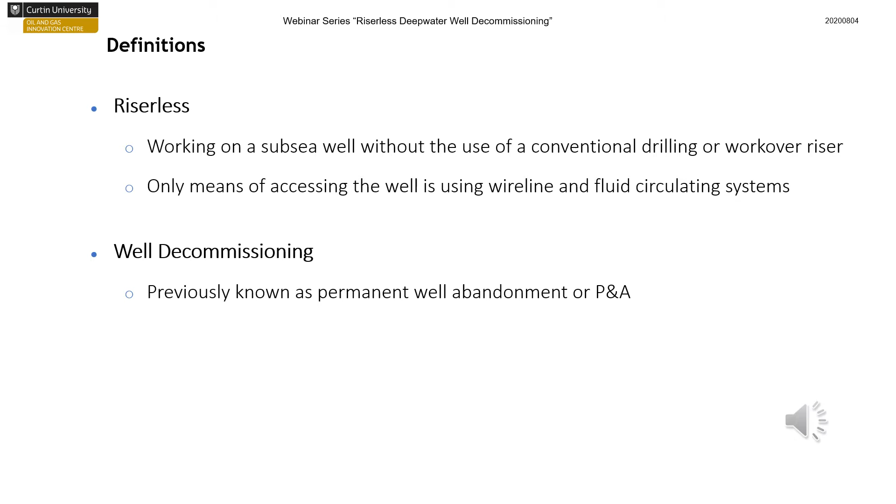In terms of wet or dry trees, the main difference is clearly the access method. A dry tree is on a platform or on land, and a wet tree is underwater. So with a dry tree, very simple, you can rig up with a drilling rig, workover rig, hydraulic workover unit, coil, or you can use wireline and pumping, which is the more preferred method from a cost perspective because you can then apply rigless techniques to the dry tree wells.

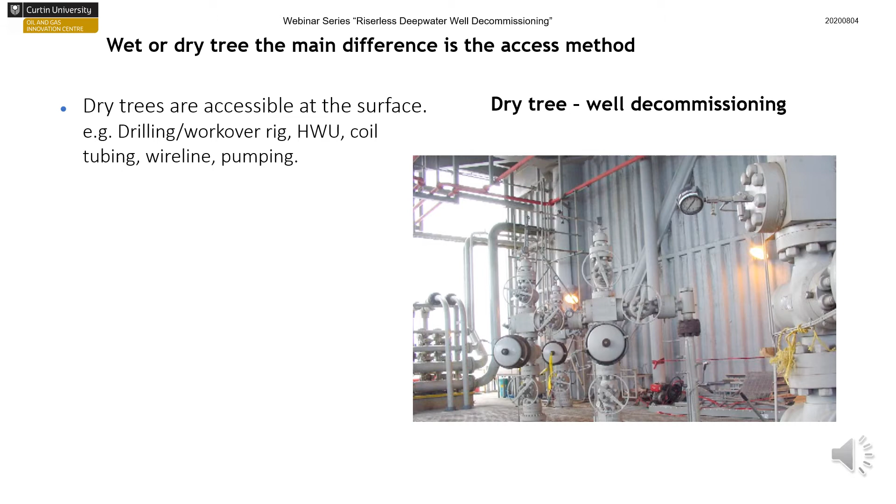With subsea, especially deep water, the fundamental difference is you have to have a vessel of some description, and from that vessel you then need to launch specialist equipment that allows you to make a pressure connection to the top of the tree, whether it's vertical or horizontal, so that you have well control during your deep water well decommissioning operations.

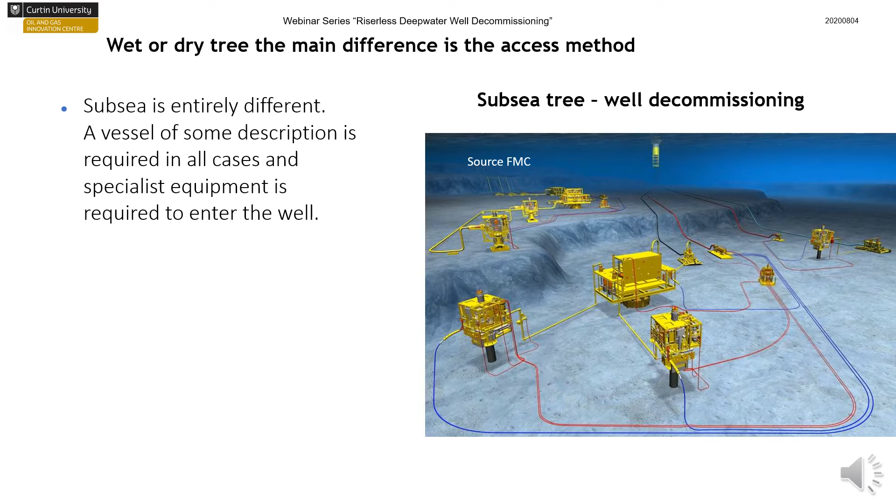We know we need a vessel, so let's understand what those vessel types could be. We've taken here, Statoil as a source - it's the Norwegian continental shelf categories of vessels to access wells. Cat A is quite often a monohull, and the capabilities are usually interfacing with the tree with a subsea intervention system and the capability to run wireline.

Cat B can be a small semi-sub or a monohull, but the difference is it can riser up with a high pressure, rather small ID riser, but it can do a little bit more with through tubing access. Now Cat C are your standard drilling rigs developed by the drilling contractors. It can be semis, drill ships, ultra deep water drill ships, deep water jackups, and we'll only be talking about the first three categories in this particular webinar.

But for interest, Cat D is what Statoil classes a workhorse semi, and its basic aim is for production drilling and completion operations up to the ice edge. Cat I is currently in development, but it's a very harsh environment, Arctic drill ship. And Cat J is again, a workhorse jackup for water depths between 70 and 150 meters, specifically targeted at harsh environments, which is very prevalent offshore Norway.

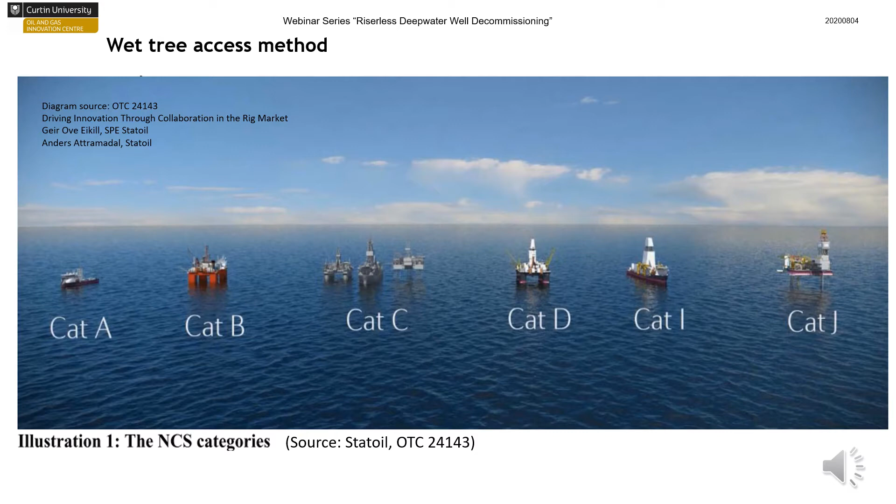As always in the oil and gas industry, nothing's quite black and white, but let's just, for the sake of clarity, define pictorially what those classifications for the first three cats are. So you've got rigless light well intervention, normally a monohull, left hand side of the graphic, and it's wireline. Obviously you can run tractors on electric line. Very short BHAs because they're limited by the length of the riser above the subsea intervention system.

Cat B is for slightly heavier intervention and through tubing access. Normally there's a small bore riser which gives you full pressure access to the well, and you can do quite a reasonable range of through tubing services. And Cat C, which is your normal drilling and completion rigs, semis or drill ships, and they've got a standard set of large bore, usually 18 3/4 BOPs, and then above that you've got the low pressure, normally a 21-inch standard riser. You can riser up with a concentric high pressure and a subsea test tree if you want to do live well intervention, but we won't be discussing that here because it's rather an expensive exercise and it's not targeted specifically at well decommissioning in deep water.

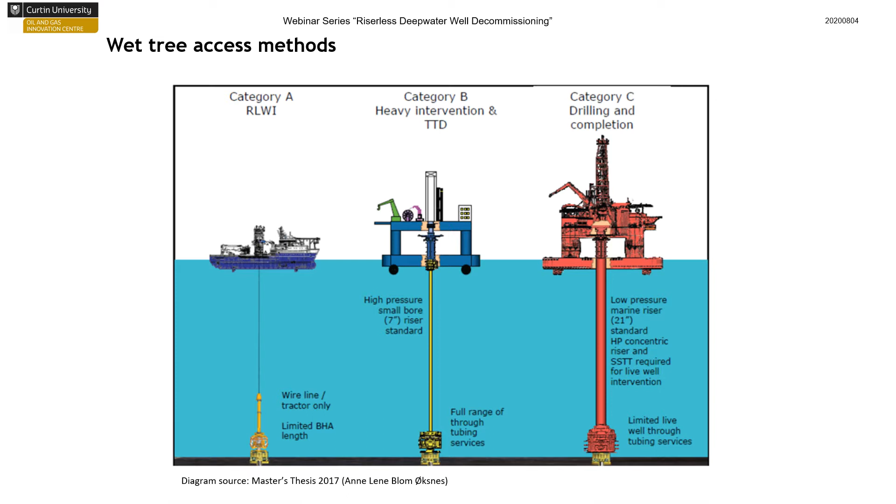So in a deep water well decommissioning environment, you have to consider a myriad of different variables, but let's just look at a short list. So you have to define corporately what your decom strategy is. Is it to look at the operation, say we'd like to execute to satisfy our corporate and our regulatory body, but we'd like to use a riserless method? Great. Or we'd like to go riser because we're more confident that that's what we'll need because there are problems with wells. That's possible.

Are you looking at caprock restoration? A lot of companies are now looking at this because of the significant cost and time savings. It may or may not be applicable to your organization, but certainly it's definitely worth pursuing if you have the opportunity.

When you look at vessel type, that comes from whether you are risering up or trying to go riserless. Complexity obviously plays a great part in this. Water depth plays a great part too. And never forget that economics drives everything. So no matter what you decide, it'll be the financials that determine whether to proceed with an investment decision.

With respect to complexity of completion design, there are some things to keep in mind. In the newer deepwater wells, there can often be chemical injection lines going deep into the well. There can also be electric lines, and some regulations indicate it's best practice not to include those within a well barrier element, although research in the last few years indicates that's perhaps not as big an issue as people thought with respect to microannulus formation around those umbilicals and electric lines.

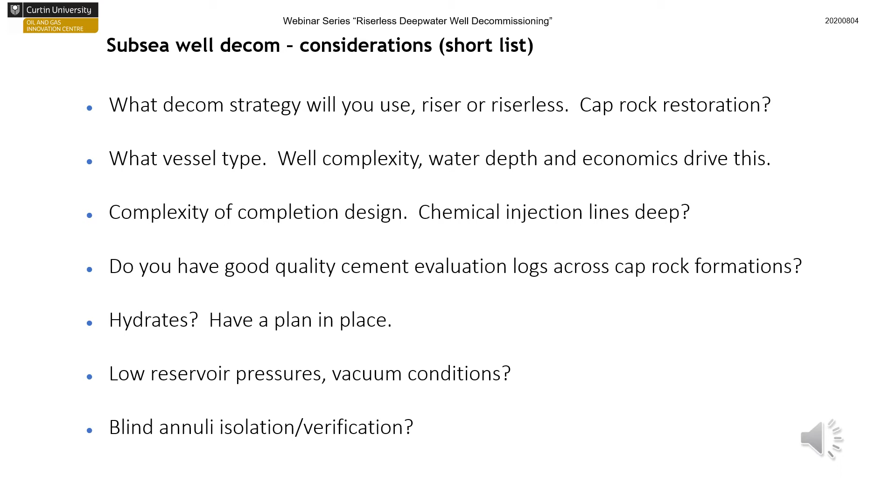Blind annulus isolation is a very big topic. How do you know if you have sustained casing pressure in a blind annulus? The answer is you don't know, because for the life of that well, due to the design of the wellhead, the only annulus you can monitor is between the production tubing and the production casing, classed as the A annulus. There are one or two very specialist wellheads developed in the last few years to do more than just annulus monitoring, but they're very rare.

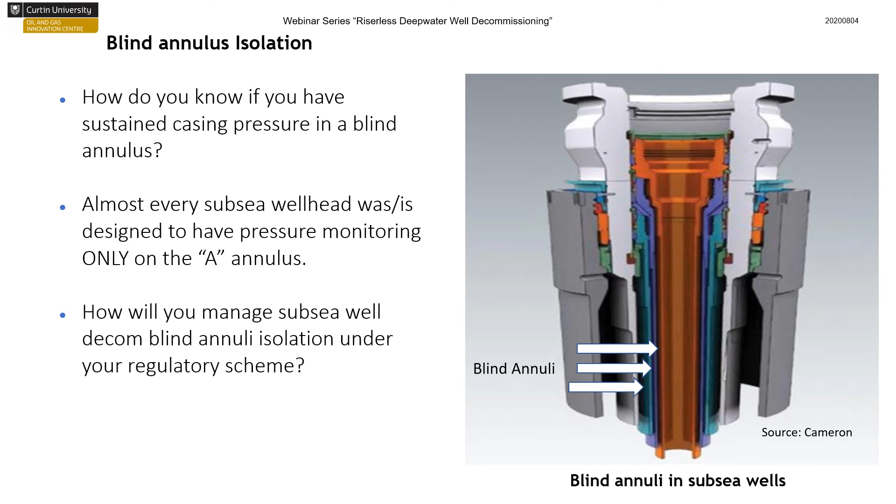So how will you manage subsea well decom with blind annulus isolation, or blind annuli being the plural, if your regulatory scheme prescribes that you have to verify there is a barrier in place and that it's tested or verified? That's a complicated problem which in the past has normally required the use of a rig.

The US regulations are very explicit with respect to this annulus space that communicates with open hole and extends to the mudline. The Code of Federal Regulations, section 250.1715, states that a cement plug of at least 200 feet has to be set in the annulus space. It does refer to a well completed above the ocean surface, but working with the BSEE organization, this is also applied to subsea wells, and a lot of oil and gas companies with significant assets in the Gulf of Mexico apply the same standard.

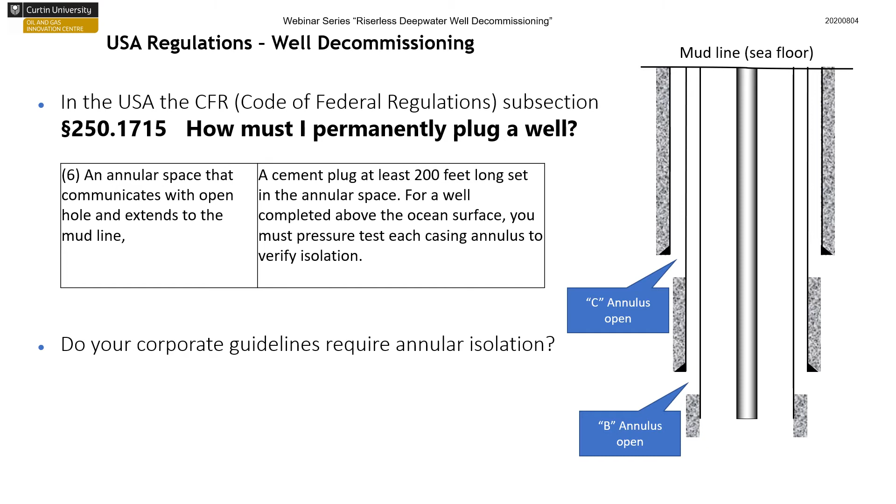That requirement, prior to a few years ago, always required the use of a big rig to isolate those blind annuli. So you have to look at whether your corporate guidelines require annular isolation, and if so, how will you perform it? Because it can be done, clearly with a big rig, but it gets to be exceedingly expensive.

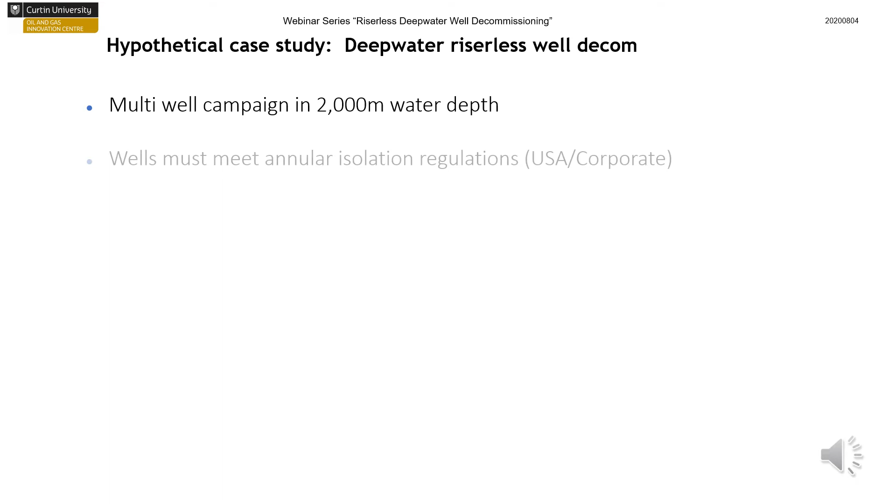So in the hypothetical case study, we've made it really simple: it's a deepwater riserless well decom, and we put a lot of boundaries into it. We said it's a multi-well campaign, 2,000 meters of water depth, and the wells must meet annular isolation regulations. The cost for a Cat C vessel is estimated at approximately 30 million Australian dollars per well—that's access with a big rig.

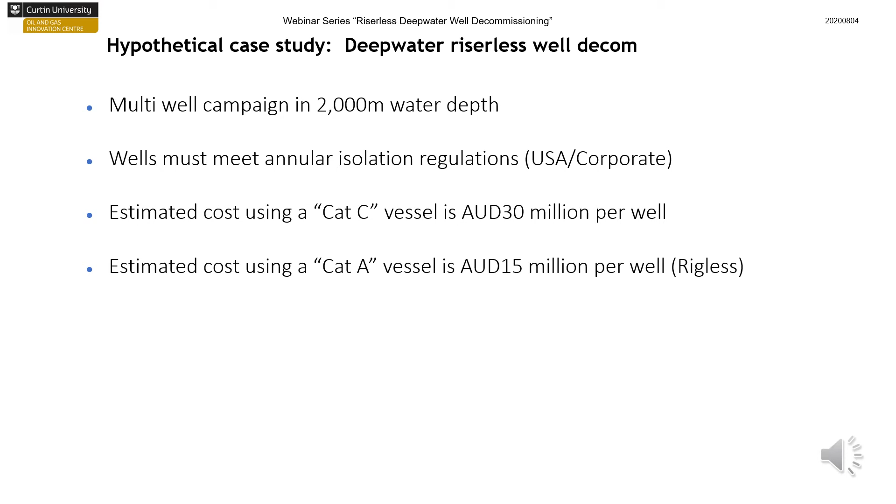The cost to access the well with a Cat A vessel is estimated at $15 million per well, which is a rigless operation. Well decommissioning activities are common practice irrespective of whether the well is underwater or at surface, so they will not be covered in this case study, because they were already covered in detail in the rigless well decommissioning webinar before this one. If you get a chance, please go look at that, and bear in mind everything you see there is applicable to deep water wells.

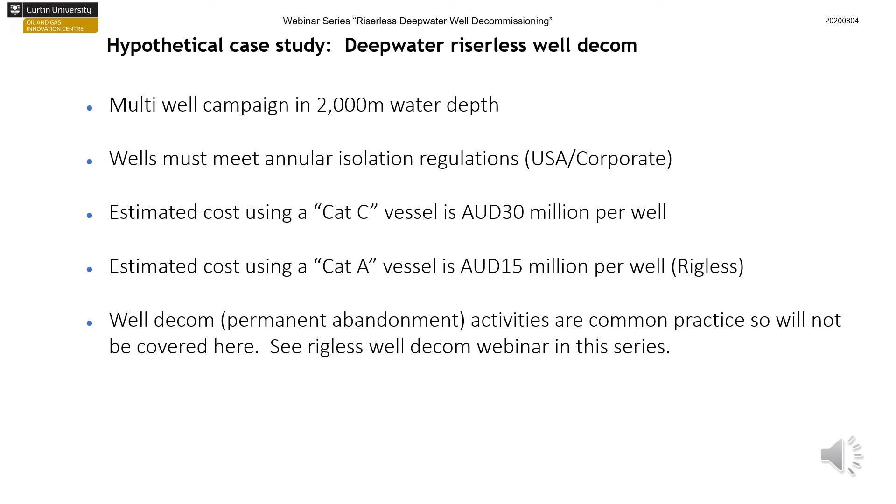Now all engineering work has been finished and the company has elected to execute the project riserless. Never underestimate the amount of work required to get to this stage. We've made it look really simple, but this is multiple months, if not more, of extremely detailed engineering work.

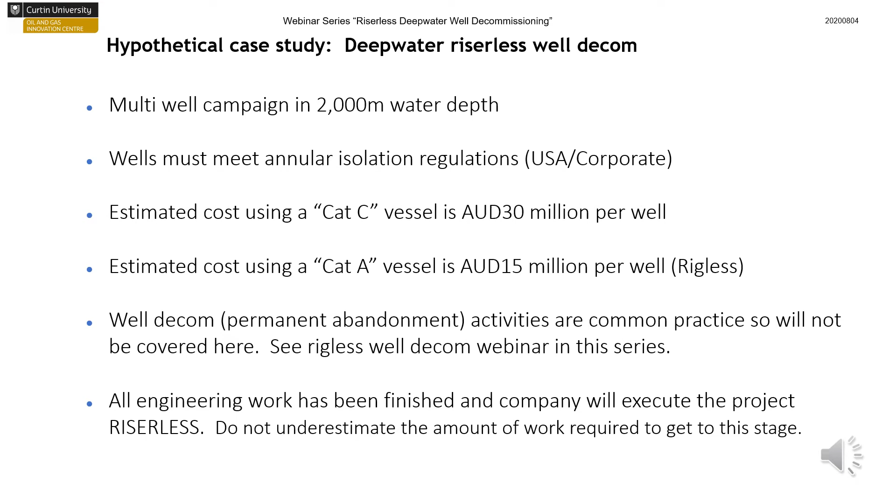We know we need a vessel, which is absolutely mission critical, but also mission critical in a subsea deep water environment is a well intervention system. We've used a graphic sourced from TechnipFMC, very pictorial and simple. It says we need a pressure control head for our wireline, whether slick line or electric line. We need a lubricator to run tools into the well under full well control. We have a lower lubricator package which allows us to close in the well, install tools, lock on the pressure control head, and reopen the lower lubricator package. We've obviously got a full well control package with shear capabilities, and for a riserless well intervention we have to have circulation.

It's not shown on this diagram, but there's a module that can be applied to give full circulation, and several other companies who provide this type of equipment have circulation systems. If you look at the right hand side, remember that's one of the graphics previously - that yellow piece in the middle of our graphic is below the category A rigless light well intervention vessel, shown sitting on top of the tree on the seafloor.

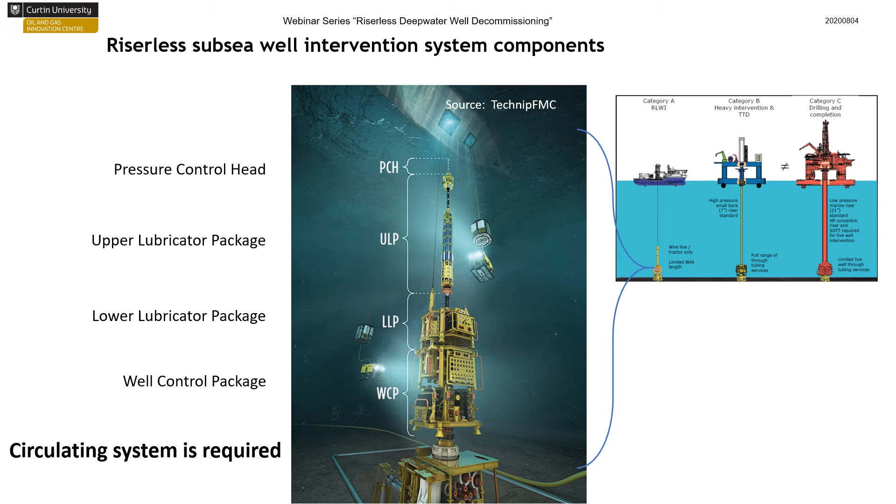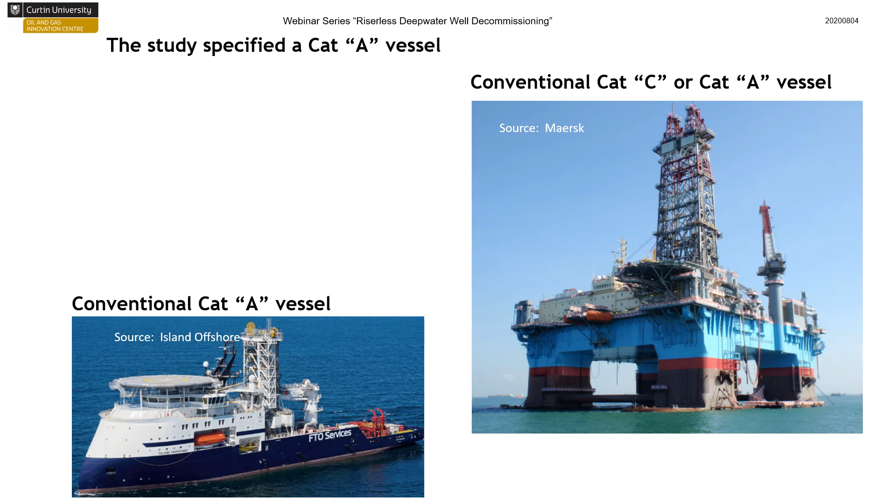So we are in a hypothetical study which specified a Cat A vessel, and pretty much everybody who's been around subsea well decommissioning will recognize a vessel like this. It's very common, it's got its own work tower, it's a DP2 or normally DP3 with work class ROVs, etc. That's obviously what we'll be looking at. But bear in mind that outside of this particular case study, that doesn't look like a Cat A vessel - that looks like a Cat C, right?

But if the market, as it is right now, unfortunately very low oil prices, and so the rig market is extremely dire - you can possibly in the future, if you're embarking on a rigless operation, secure a very large DP semi for little more than the cost of a standard Cat A vessel. So bear in mind there are some advantages to this, in fact significant advantages insofar as you have very large deck spaces, you've got DP3, you've got normally better weather capabilities than a monohull vessel. So don't rule out using a big rig simply because you think the prices are escalated significantly higher than a conventional Cat A, because in a low oil price environment that might not be the case.

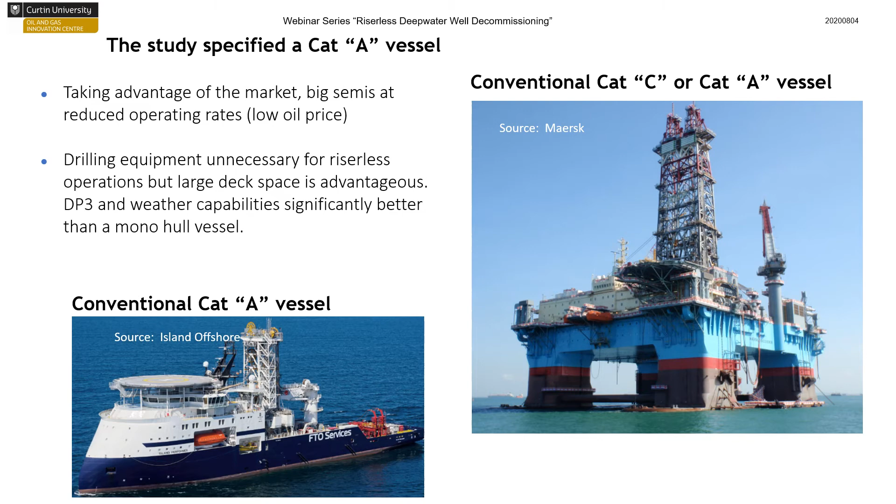So we start with the end in mind, and we'll restore the caprock because it's a hypothetical case study, and it's by far the preferential method for reducing the cost for any well decommissioning, whether it's a dry tree or wet tree. We'll install our secondary and primary barriers in the caprock. Remember, because it's a subsea study, we did need access to a cement evaluation log, and the reference in this case is you have to have good quality bond across the caprock for a minimum length. We've said in this case it's at least 200 meters because we'll place two primary secondary barriers, each of 100 meters in length, and we'll place those at the caprock, and we won't isolate the lower part of the completion because our subsurface teams have already decided there will be no detrimental effect over geological time.

So how we'll do this is quite simple. We won't go into the nitty-gritty of it, but we'll perforate the tubing string, then circulate the well, and circulate our barrier material, which is normally cement, down the tubing into the annulus. We'll do that twice, and we'll have a primary and a secondary barrier in place.

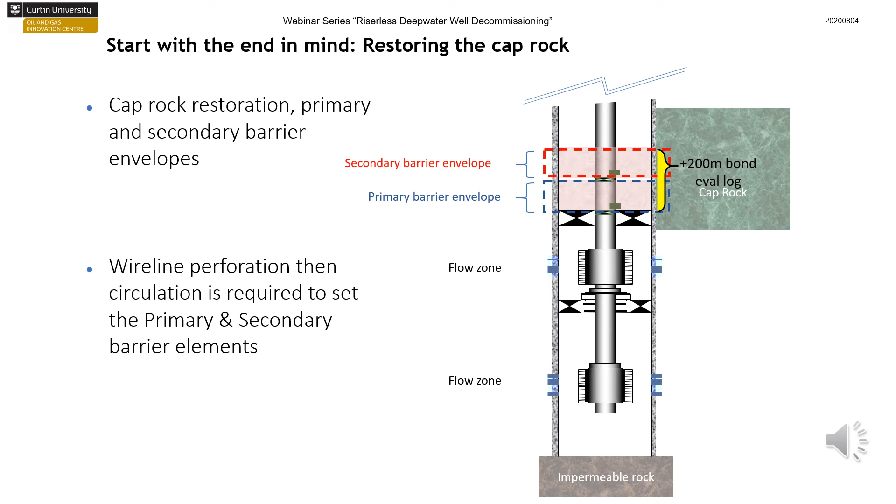So that previous slide basically was riserless deepwater well decommissioning at the reservoir level.

But the next step is intermediate barriers, which is again relatively simple, and it requires the same information set, that being a cement evaluation log across the impermeable rock above any aquifer and or other hydrocarbon zones in the well of a minimum length, and in our case we've said it's 200 meters because we're setting a primary secondary barrier envelope across that part of the well.

And we do exactly the same thing. We wireline perforate the tubing string, then we circulate each of those barriers into place, and we pressure test those barriers independently to the primary. Then we set the second barrier, and we are good to go on the next part of the well. Bear in mind again that in the previous webinar we talked about slumping of barrier material, so that's been considered, but you should consider that independently if you are actually embarking on a real decommissioning deepwater program.

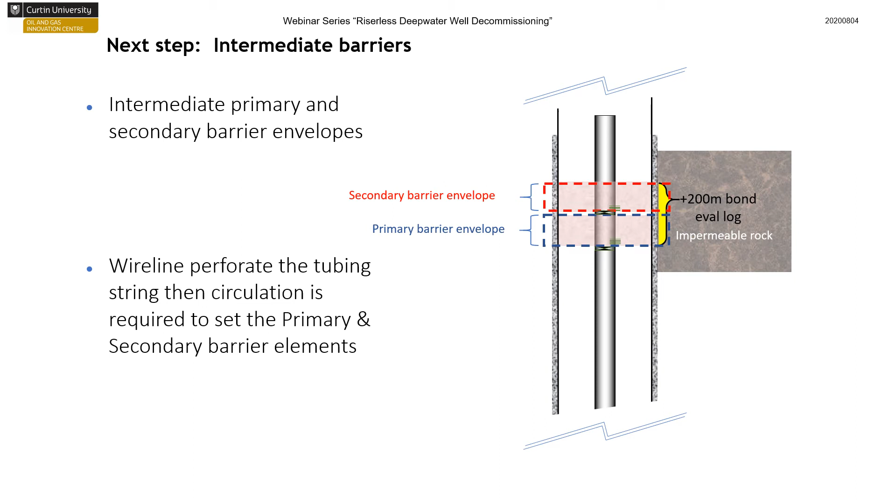So now the final step, and in a riserless deepwater well decommissioning operation, this is normally being done with a big rig, but in our case we've elected to do the whole project riserless, meaning we're not using a big rig for its large rig capabilities, tubing handling and milling capabilities. We might use it as a staging point for our subsea intervention system, but we're going to do this riserless, and we have to accomplish this in the case study in order to get acceptance from the regulatory body that the well has been isolated to a satisfactory requirement, which means annular barriers are placed and tested.

And if that's not the case, if we don't manage to do that, this well will remain on the books as a liability on the balance sheet until such time as we go back with the big rig and actually execute that program for installing those barriers.

So how's this done in a riserless environment? This is the thing that a lot of people many years ago said we couldn't do, but it has been done, and we'll go through how it's done.

So first off, bear in mind you've got in the center of the wellbore, below that bridge plug, a production tubing which has been cut, and the upper part of that tubing, including the surface controlled subsurface safety valve, has been pulled open water. The well is already dead and isolated, and the lower part of the well is classed as already permanently abandoned, so we can pull this open water.

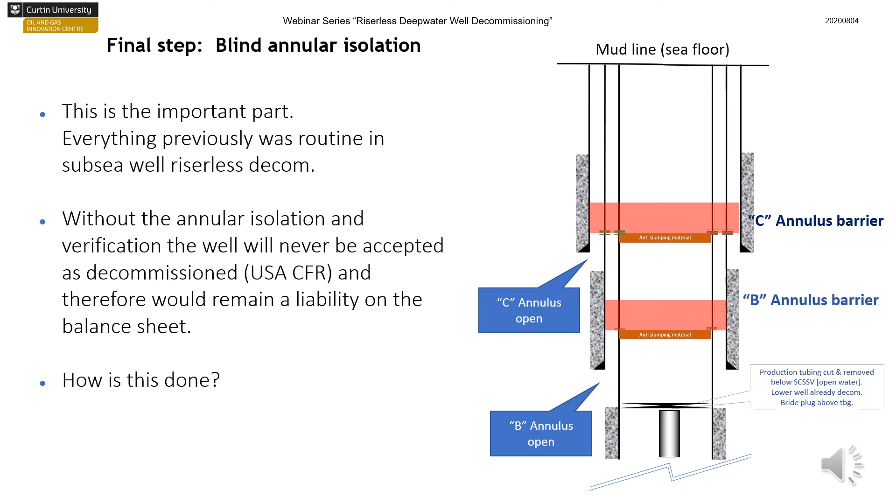So the reason why you're probably watching this webinar is to find out how can we isolate those blind annuli in a riserless environment, subsea, deep water. So we need a subsea well intervention system, which is the large yellow equipment that we saw on previous slides. Below that we have a tubing string of a certain dimension, depending on the well geometry.

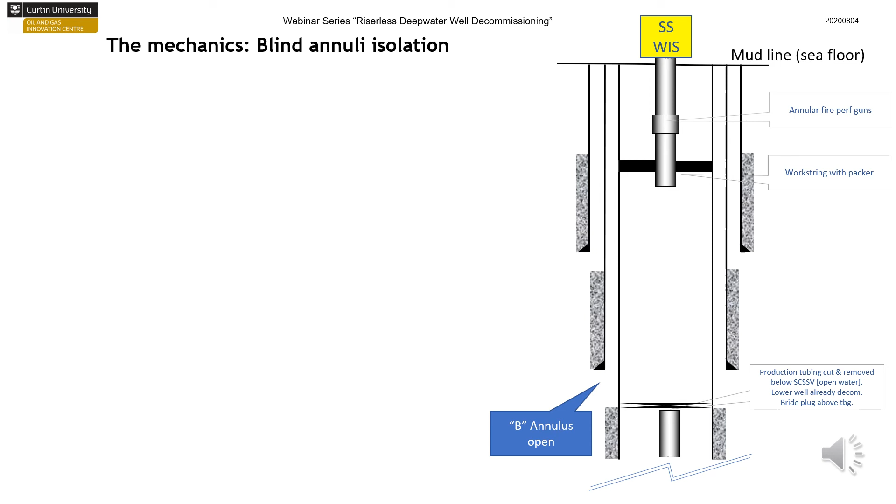We have a work string which has got a packer at the base that can be actuated, so we can isolate the well above the packer and below the packer from a pressure perspective. Above the packer there are a set of annular fire perforation guns, and we'll go through why we need this shortly. We have an open B annulus. We are now going to wireline perforate the casing through the work string below the production packer, and we're going to perforate the casing above the packer using the annular fire systems, and you'll see what happens next.

We've now got a circulation path. If we were to pump down through the subsea well intervention system through the work string, out of the work string and down to the perforations, it will go back up the open annulus and come back to us into the wellbore, which is all pressure controlled because we're sitting on top of the large bore wellhead connector. So we've got full well control through the well intervention system, and we can take returns above the packer, and circulate till we feel comfortable that we've got clean and uniform fluids throughout that annulus.

And because we've now got circulation and we understand the exact geometries, we can place that B annulus barrier. So we pump down through the tubing string into the casing, we displace it such that we end up with a plug through the perforations, uniform across the internal part of the production casing and the B annulus. This is super simplified. We've talked about slumping material.

You may have to make two runs with perforation guns. The first run to set the material to stop the slumping of the material in the main wellbore, and then come back and set a second set of perforations to do the plug.

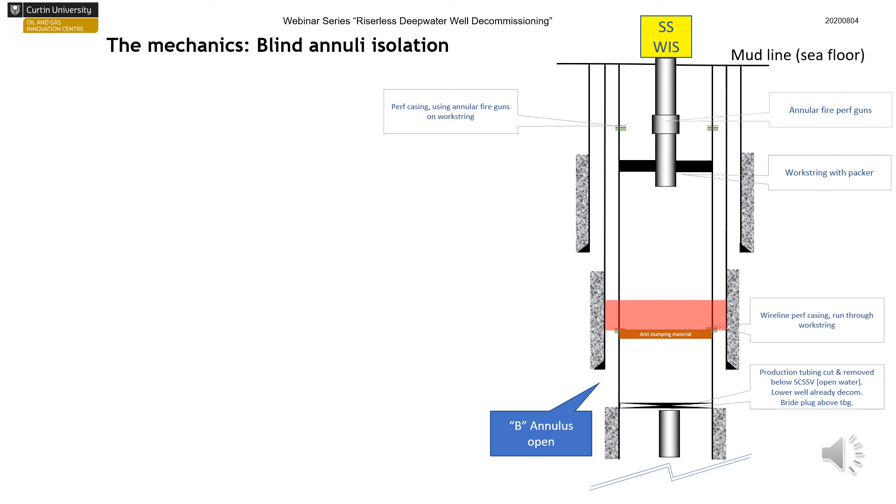For simplicity's sake, we said we'd use a methodology for anti-slumping. So we've now got the B annulus completely isolated and tested, pressure tested positively and negatively. We've also tagged the top of that barrier with wireline coming through the work string.

So now we have an open C annulus we have to address. How do we do this? It's a bit more complex because there are 2 annuli as opposed to 1.

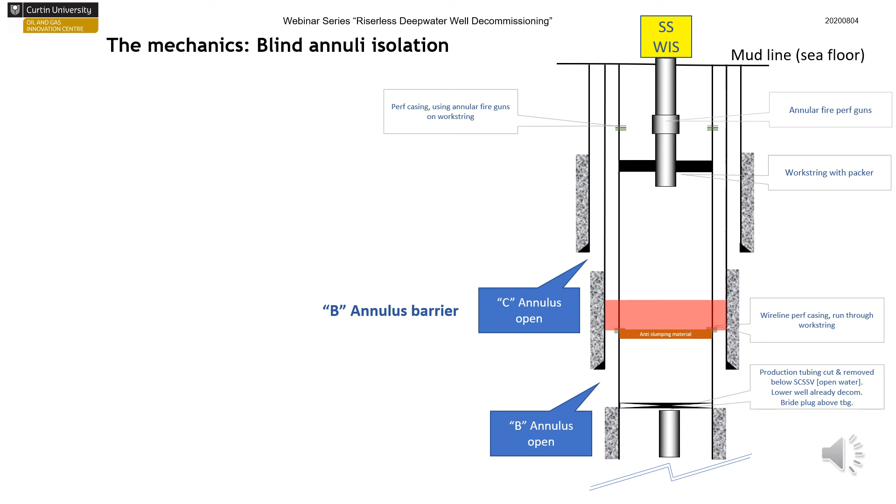We'll do the same thing. We'll perforate the production casing, but this time through 2 strings of casing, and the perforation technology is extremely advanced. Don't think you can't do this without damaging that 3rd string, because it's eminently feasible and has been proved multiple times.

You can design specific charges to only perforate through whichever casing strings you have in your well, in any geometric configuration, whether concentric or otherwise, without damaging that 3rd string such that you've got a pressure problem, because that's not advisable nor wanted.

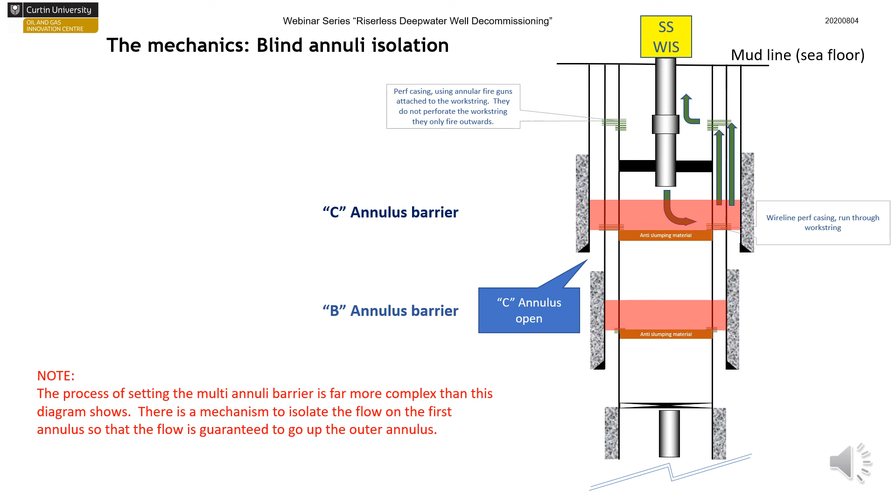We've already got the B and C completely isolated, and now we're looking at an environmental barrier which we normally would set inside the production casing string, just above the perforations we used, which was sitting originally above the work string packer, to isolate those into the center wellbore.

So we've verified the barriers by wireline tagging the top of the barrier inside the production casing. We've now also got positive pressure tests, and you can apply negative pressure tests too, which some companies like, through the production casing and the annuli independently, because it's a separate system isolated by that packer on the work string. There is a patent for this methodology.

There are other systems used in shallow water environments, which normally don't use a packer. They use possibly inflatables and/or cup type tester systems. These have been applied in the North Sea, but this particular system here is a method patent, and you can go look it up if you so choose.

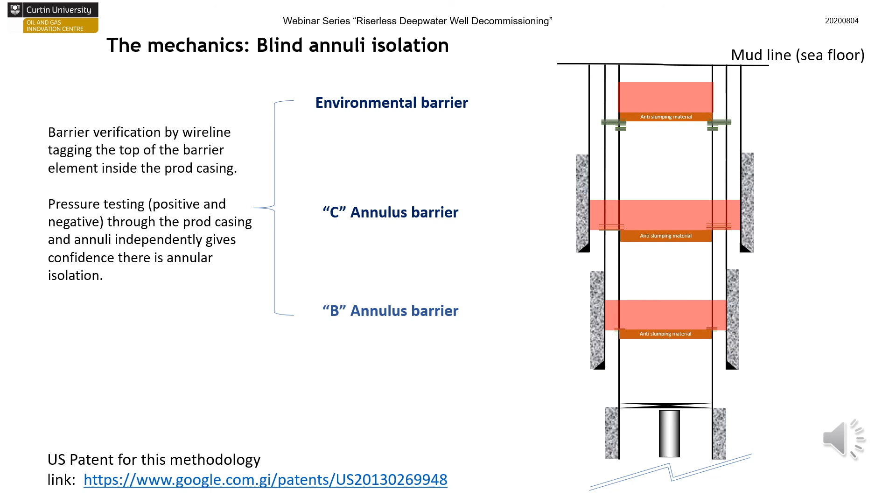So in this case, the riserless well decom could actually save us 50% or more of the existing operator well decommissioning estimates using a big rig.

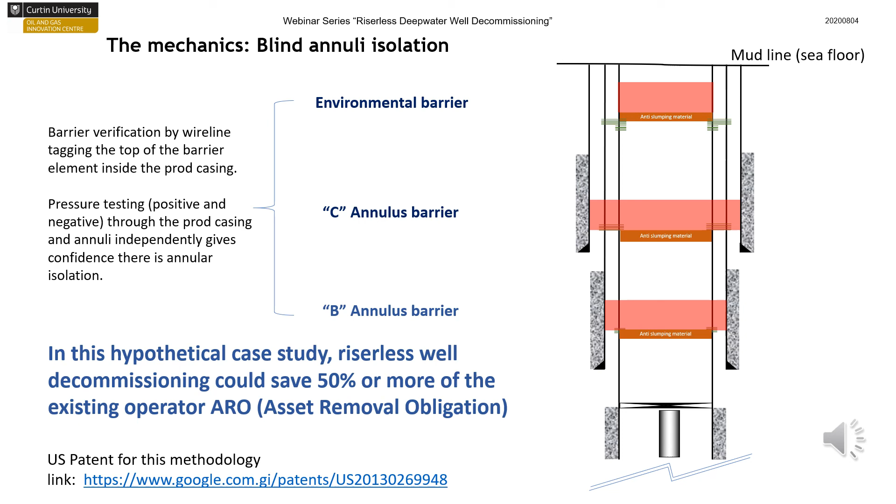We went through a constraint-bounded hypothetical case, but there was actually a work program conducted in the Gulf of Mexico, and the operator was Marubeni Oil and Gas. In 2016, they decommissioned 9 deepwater wells, using only wireline and pumping, and met all BSEE regulations on the complete well decommissioning process, including the blind annulus isolation.

But it has been done, so the track record is there, the precedent is set. If people say you can't do it riserless, point them to this article, because it clearly can be done and was done and was successfully accomplished. A very large proportion of the estimated time was saved, and that equates directly to saved costs.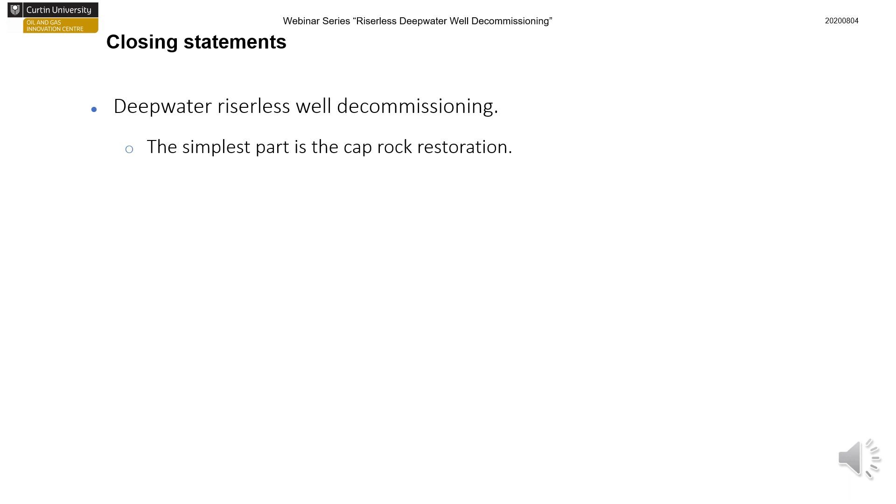To close out the deepwater riserless well decommissioning, there's no question that the simplest part is the deep well decommissioning process, which is the caprock restoration in this particular case. Absolutely no question that the devil is in the details when it comes to deepwater riserless blind annuli or annulus isolation. There's no doubt it's possible, it's been done, but it is a complicated issue.

But if you can crack that difficult nut, there are some huge gains in terms of time and cost, because you can do the complete well decommissioning process without accessing the well with a big rig.

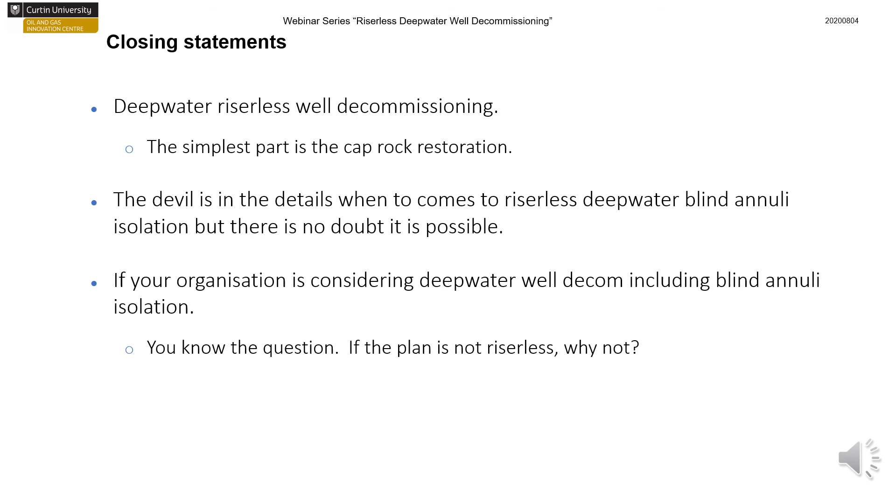So if you are considering deepwater well decommissioning, and you're in the place that says you have to have blind annulus or annuli isolation and verification, refer back to this, but don't use this as the gospel. This is a high level, very short 30-minute presentation, but it's been done, and you can do it too if you contact the right individuals.